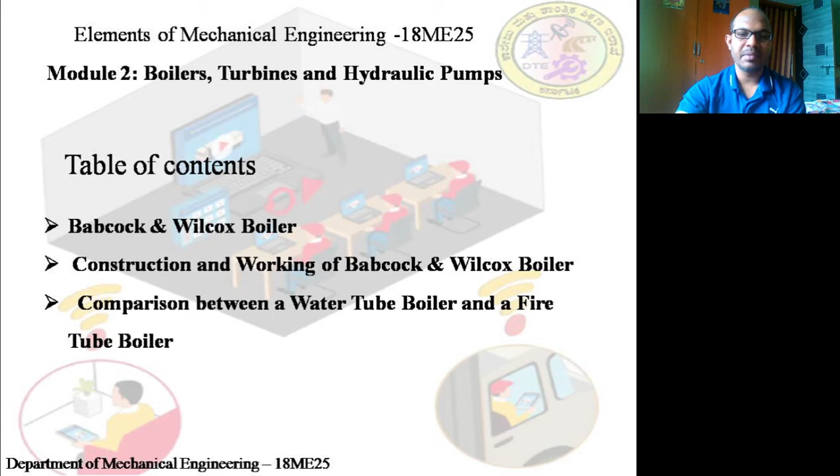So in this session, let us discuss one more boiler in your syllabus, which comes under the category of water tube boilers. This session covers the Babcock and Wilcox boiler, the construction and working of a Babcock and Wilcox boiler, and then the comparison between a water tube boiler and a fire tube boiler.

Let's start. Before I start, I would like to tell you Babcock and Wilcox are the two scientists who invented this boiler, which can produce pressure much higher compared to the fire tube boiler, that is, the Lancashire one. The steam producing capacity of this Babcock and Wilcox boiler is very high.

Now this is horizontal, but it is externally fired, whereas a Lancashire boiler is internally fired. This is natural circulation, and that was also natural circulation. But the Lancashire boiler was a fire tube boiler, whereas this is a water tube boiler. Babcock and Wilcox boilers are also known as longitudinal drum boilers or horizontal tube boilers.

The capacity is more, so it is always mounted on a horizontal axis. Instead of keeping the drum perpendicular, they keep it horizontal. It has a few advantages with respect to design, because if it is horizontal, more surface will be supported, so mechanical balancing will also be easy. That is the reason why we go for that.

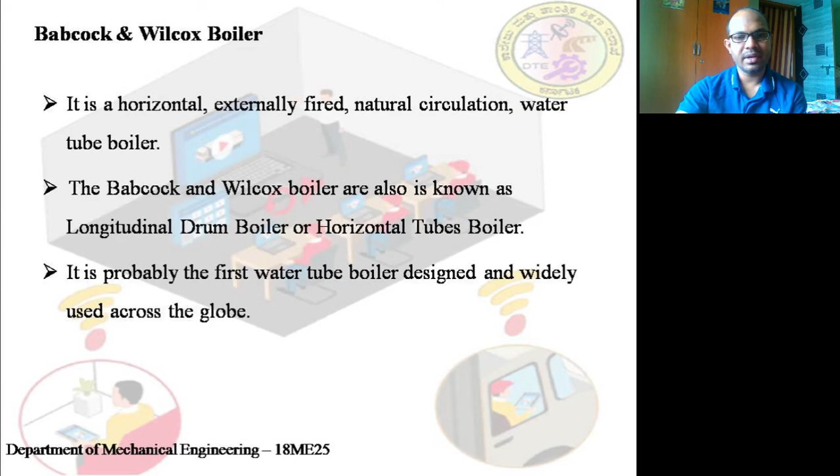It is probably the first water tube boiler designed and widely used across the globe. It is the first water tube boiler and the most used water tube boiler all around the world. Now this gives a very clear picture. It's very interesting. I will tell you the movement of the water as well as the steam here. First, I would like to tell you the constructional details.

This Babcock and Wilcox boiler has different parts. This is called a drum, in which the water and steam will be collected. This is a steam stop valve, which is used to stop the steam, and also to take the steam which is formed out to the required place. Next, this is a safety valve, which in most cases is a dead weight safety valve. And then the steam and water drum, which I have already explained.

Then there is a pressure gauge. As water is converted into steam, if we keep heating, the pressure keeps building up and increasing. So it is very difficult to know the pressure with which the steam is being formed. We cannot open it and see. Is it clear? It is not a joke. The steam will always have a higher energy level, so it can take your life also.

So we will have a sensor called the pressure gauge. This pressure gauge tells us the pressure of the steam being formed in the water drum. Now, there will also be a water gauge on the left side. The water will be continuously converted into steam.

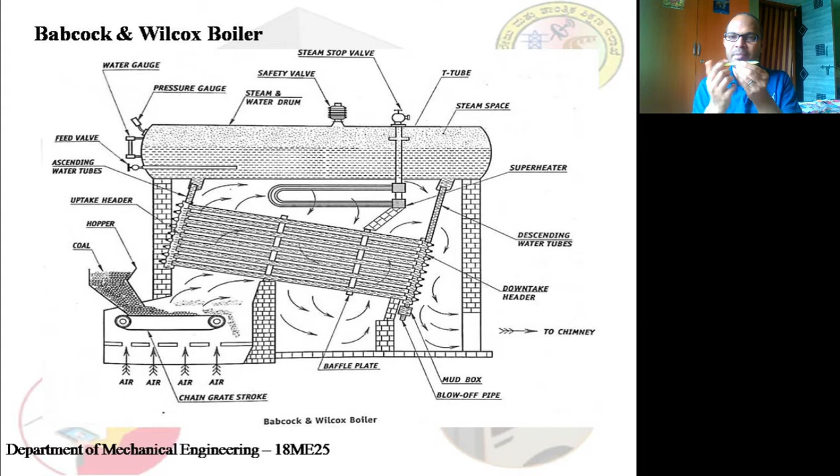What is the principle of a water tube boiler? Water flows through the pipes and they are surrounded by the heat, so the water inside the pipes will be heated up. Correct? The same thing here: we have a number of pipes over here in which the water is flowing.

Is it clear? So the flue gases are coming over here like this. So it has been exposed to the flue gases, once it is being heated.

Now, before I explain this, by the physics of the fluids, I will just tell you: whether it may be air or water or any fluid, any liquid or a gas, once it is hot, its density decreases. Its density decreases, that means its weight will decrease, so it tries to move upwards, whether it may be air or water or any liquid. Once it becomes hot, it will move upwards.

It will move upwards. Thus, in the downtake header, whatever water is covered over here, once it is being heated, it will go back to the drum by the uptake header. Uptake, up means it should go up. The uptake header, through which the warm water will go back over here. It will get mixed up with this normal water.

Once again, once it goes upwards, obviously the water should occupy. It will come back over here once again. Again it will be heated. The warm water will be heated. It becomes hot water and it will go here. Once again the hot water will come over here. It will heat it. Then it forms steam. Which form of steam?

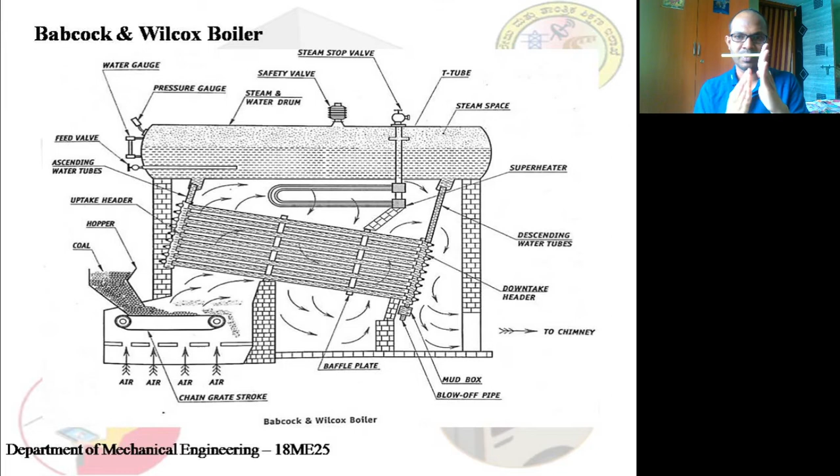Okay, in order to have uniform heating for all the sections, we have got baffle plates. If this pen is a pipe, it is separated by the baffle plates. One is this baffle plate and the other one is this baffle plate. So it is something like a channel. The flue gases which come out here will go across this, and will not go like this. It will go once again in the particular channel. So that is the use of this baffle plate.

Even in your AC you will also have a baffle plate. In the air cooler also it will direct the movement of the air. So with the use of baffle plates, it is always easy for guiding the movement of the flue gases. That is how the Babcock and Wilcox boiler works.

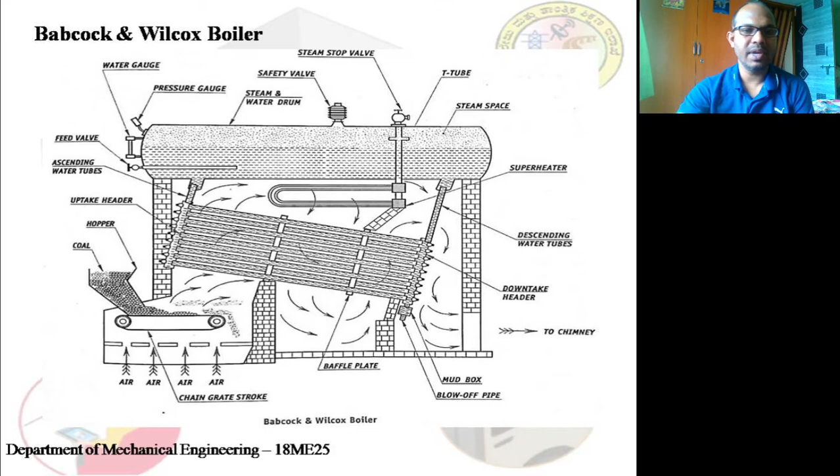And whatever it may be, the heat that is being given out to this will end up going back to the chimney at the right bottom side. Is that clear? That is the beauty of the Babcock and Wilcox boiler. Okay, let us go through the notes related to that.

A horizontal steam or water drum. This is the main part of the boiler. It is supported by a steel structure at a certain height and is independent of brickworks. The size of the boiler drum is small as compared with the boiler drum of a fire tube boiler for the same capacity. So for the Lancashire boiler the size is big compared to the Babcock and Wilcox boiler. It has water and steam. All safety and control devices are mounted on the boiler drum. Okay.

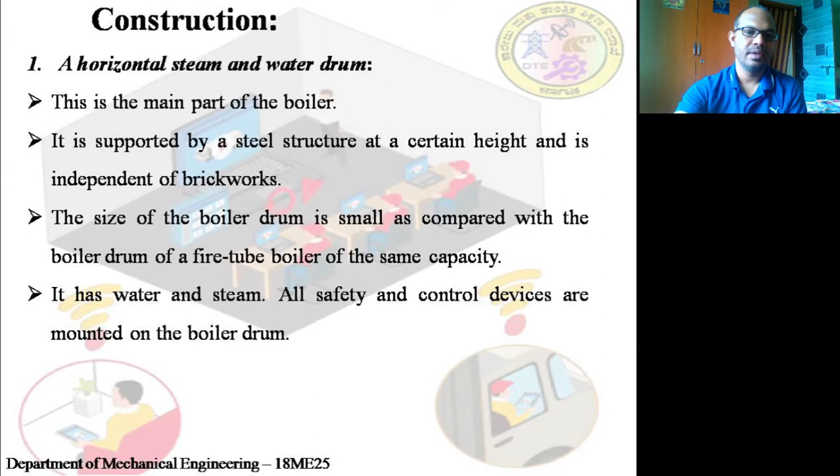Now, a bundle of steel tubes. That is what I was just talking about. Between the uptake header and the downtake header, there is a bundle of steel tubes. The front end of the boiler drum is connected to the uptake header by a short tube and the rear end is connected to the downtake header by long tubes. Between the headers, a number of small diameter steel tubes are fitted at an angle of 5 degrees to 15 degrees of inclination with the horizontal to promote the water circulation. These steel tubes are arranged in the combustion chamber in a zigzag way so that more surface area of tube is exposed to hot gases.

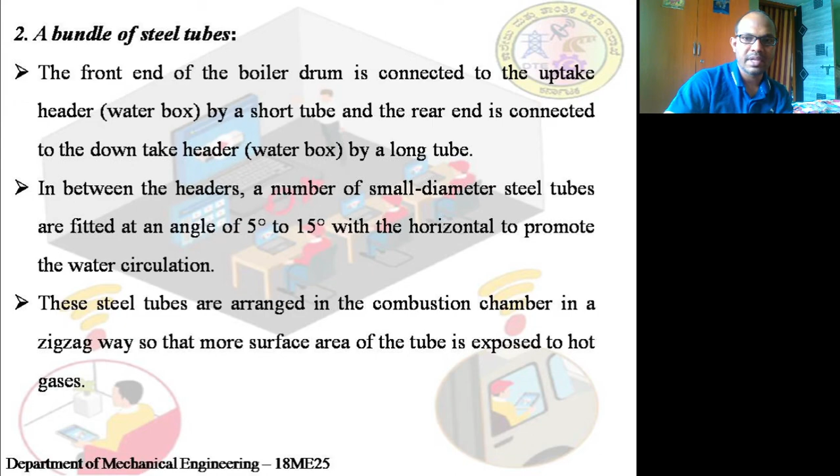Combustion chamber: it is the space above the grate below the front end of the drum where the combustion of fuel takes place. This chamber is enclosed by brickwork and is lined from inside by fire bricks. The combustion chamber is divided into separate compartments. Above the furnace is the hottest and the last chamber is the lowest temperature. This makes the path of the hot gases longer before leaving the boiler through the chimney. The superheater is placed between the drum and water tubes. The dampers are provided at the rear end of the chamber to regulate the fresh air supply for maintaining proper combustion of the fuel.

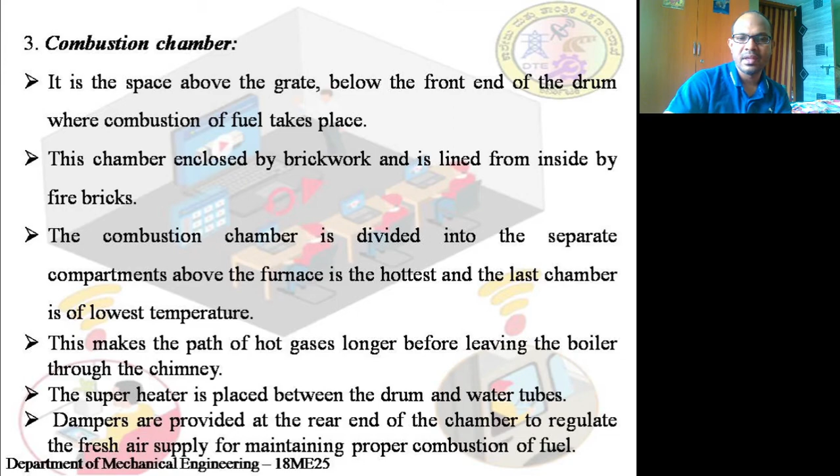Baffle plates, as we have already discussed, guide or deflect the flue gases to move in particular directions. It is placed across the water tubes. It deflects the hot gases coming out from the furnace to allow the hot gas to pass around the water tubes. Superheater is a device used to convert wet steam into superheated steam. It is a set of U tubes just below the boiler drum.

Safety and control devices are used, like the water level indicators, the pressure gauge, blow off cock, fusible plug, steam stop valve, check valves. The water level indicator and pressure gauge have all been maintained for the safety of the boiler. They are called mountings as basically these devices mount over boiler drums. Boiler drum safety is very important, my dear friends.

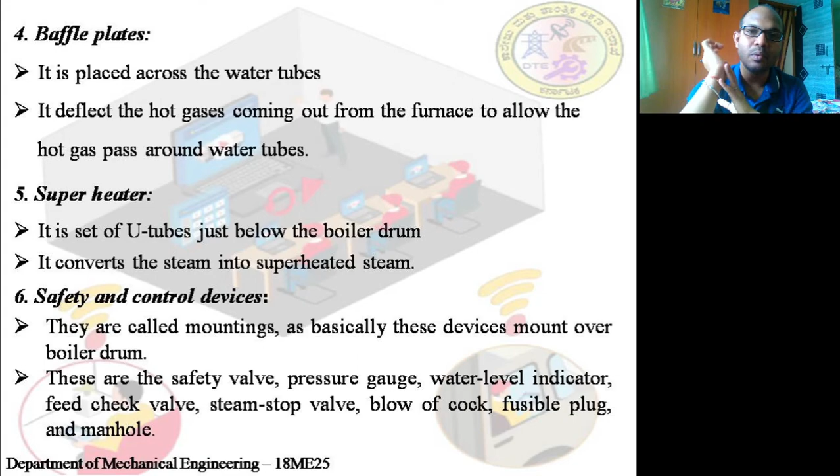You might have heard about many accidents in power plants or any industries. If a boiler has not been maintained properly and it blasts, many people will lose their lives. It has so much energy. It is something like a huge bomb. If it explodes, it will take many lives. That is why safety and control is given maximum priority.

Working water is introduced into the boiler drum through the feed valve. Water descends into the downtake header, into the water tubes, and then into the uptake header. That is what I just told you. It is something like this. This is the downtake header and this is the uptake header. Water comes to the downtake header first, gets heated up, and then goes to the uptake header. From the uptake header, it goes back to the drum.

So that is the major idea of making it as inclination pipes. Okay. Now the hot flue gases from the furnace pass over the water tubes. The path of the hot gases is guided by the baffle plates as shown in the figure and passes out

to the chimney. As the hot gases pass over the water tubes, the water gets converted into steam. This steam, due to low density, this is what I told you, because it has got a lower density, rises up through the tube through an uptake header and reaches the top of the boiler drum.

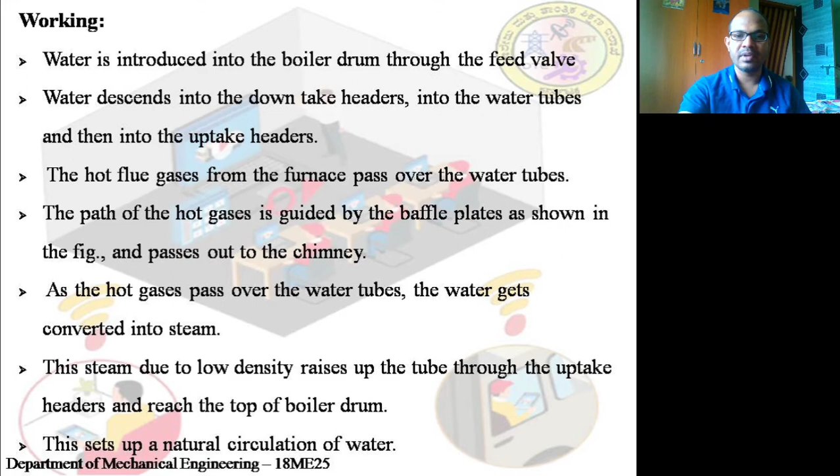The steam collected in the boiler is wet. Okay, that is what I have told you already. This is made to pass through the superheater in U tubes just below the boiler drums. The hot gases on their way out pass over these tubes, hence converting the steam into superheated steam. The superheated steam is then passed out to the turbines through the steam stop valve. Okay, now the wet steam will be converted into superheated steam once again by heating it much more.

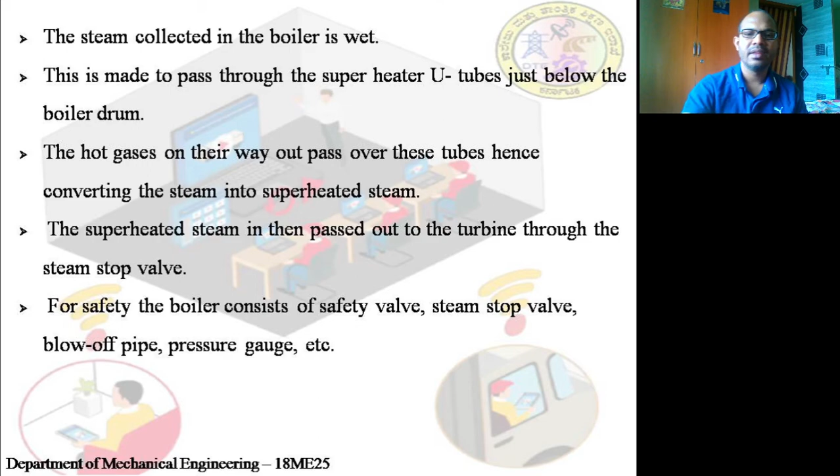For safety, the boiler consists of a safety valve, steam stop valve, blow off pipes, and the pressure gauge. That is all the working principle of the Babcock and Wilcox boiler. Now, there is one often asked question: comparison between a water tube boiler and a fire tube boiler.

Now, before I start here, as much as possible, try to explain the things with small sketches. Even for the water tube boiler and fire tube boiler, when you want to explain it, it hardly takes around 30 seconds or 1 minute. That's it. Draw two sketches: a fire tube boiler in which the pipes will be filled with flue gases, whereas here the pipes will be filled with water. Water is filled, so it is a water tube boiler. Fire tube is filled, so it is a fire tube boiler, where this is covered by water and this is covered by fire. Is that clear?

Now, let us consider the parameters. The flow of water. In a water tube boiler, water flows through the tubes surrounded by the hot gases. This is the basic principle. Whereas in a fire tube boiler, the hot gases flow through the tubes and water in the drum surrounds the tubes. If you take the water circulation, water circulates in a definite direction between the drum and the water tubes.

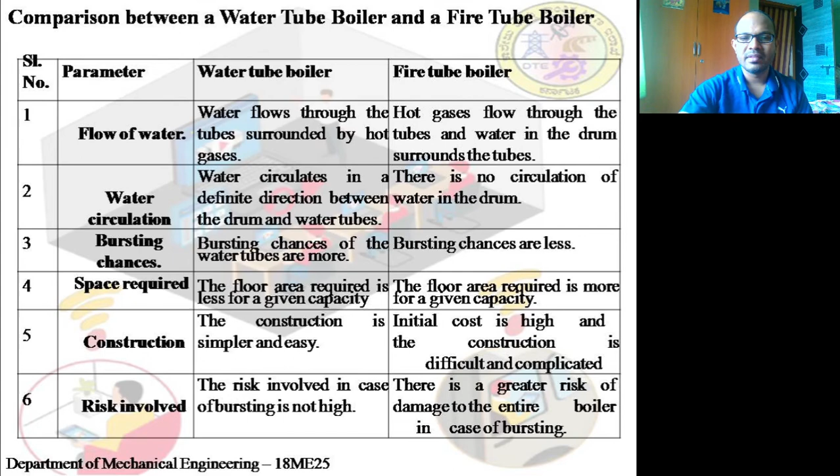The construction parameter tells you the construction is simpler and easy in a water tube boiler. Whereas in a fire tube boiler, the initial cost is high and the construction is difficult and complicated. That is it. The risk involved in case of bursting is not high. The same point has been repeated. Water tube boilers are safer than the fire tube boiler. That's it. Transportation. The transportation is easier and convenient because of the smaller size of the boiler shell.

Whereas in the transportation for the fire tube boiler, it is difficult due to the large size of the drum. Especially road transportation, or transporting from one place to the other place, will be very difficult. So in most of the cases, if they want to go for a fire tube boiler, they will start constructing in the place where there is a requirement.

That is a restriction. Treatment of water. Feed water treatment is a must, as scale formation in tubes may lead to bursting. Whereas the feed water treatment is not necessary, as the scale formation will not lead to any bursting over there, because it will be flowing. The water will be flowing in the downtake header and even in the pipes, and then it will be going to the uptake header, and then back to the number of tubes and the drum. So the cleaning or the treatment of water is required.

Or else what happens, there will be scaling formation. My dear friend, scaling means, you might have seen the immersion coil which we use for water heating purposes. In the immersion coil, if you keep heating it up, there will be a salt collection on the surface of the immersion coil. A white color, very hard. Scaling will be formed. That is what we call scaling. Is it clear? That has to be removed.

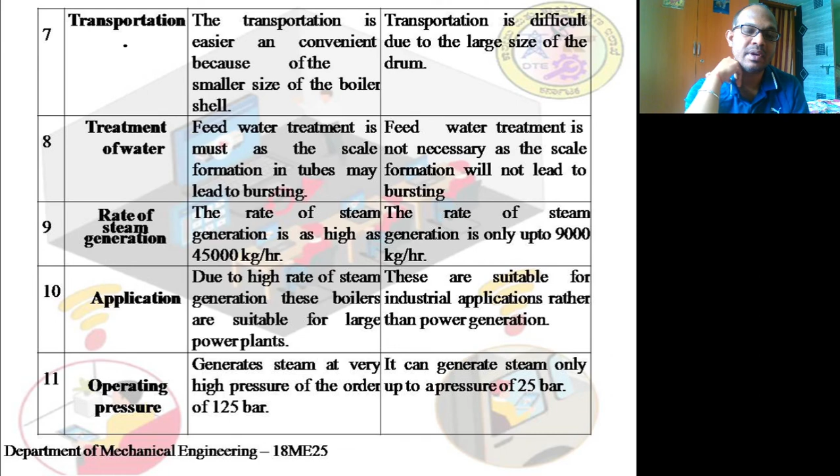Operating pressures: the fire tube boiler operates at 25 bars, whereas water tube boilers operate at 125 bars. Here also it is 5 times larger than the fire tube boiler. That is the reason why it is extensively used in power production. So the power generation sectors always go for water tube boilers because of their capacity of producing steam and the pressure with which they generate. Now you can get an idea how much power it will have when it generates at 125 bars of pressure.

Now let me talk about the advantages and disadvantages of water tube boilers over fire tube boilers. Advantages: steam can be raised more quickly in the water tube boiler. Steam at higher pressure can be produced. Higher rate of evaporation, which we have also discussed just now. Sediment deposition is less, and it is suitable for any type of fuel and method of firing. More effective heat transfer. That means heat will be transferred more effectively from the flue gases to the water.

Failure of water tubes will not affect the working of the boiler, and more safety can be expected in water tube boilers. Occupies less space, so the initial investment is less, the maintenance is less, and the cost is also less. Once the size is less, it is easy for transportation. Now, if you consider the disadvantages: not suitable for ordinary water. Water pre-treatment is required because it may often lead to scaling formation.

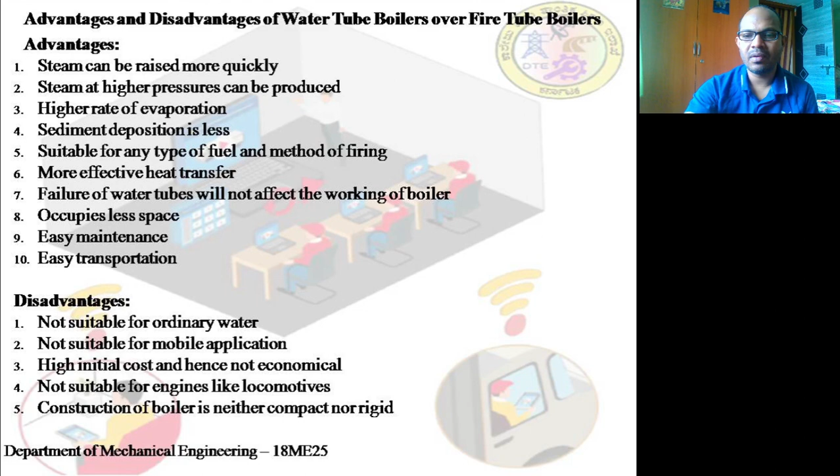Not suitable for mobile applications. Though it is smaller, it is not as small as the Cochrane boilers or other types of small boilers. So not suitable for mobile applications. It has to be in a fixed position because it will be generating around 125 bars of pressure. So it has to be of fixed type. High initial cost and hence not economical. Not suitable for engines like locomotives. Construction of boilers is neither compact nor rigid. These are a few disadvantages. A few assignment questions will be given over here.